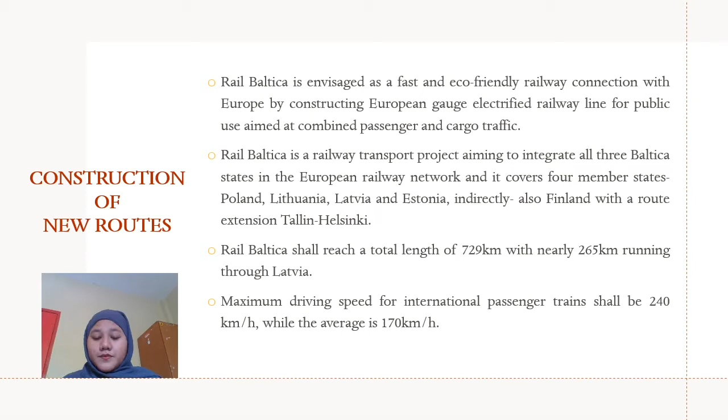For the construction of branch line, the first one is crossing of the Latvian-Estonian border. The Latvian-Estonian border crossing shall be installed in Salacgriva municipality in the territory of Latvia and in Pärnu county in the territory of Estonia. It was selected in mid 2014 as part of intergovernmental cooperation agreeing on the best mutually acceptable solution out of 3 border crossing solutions

suggested by Estonia. The Ministry of Transport of the Republic of Latvia and the Ministry of Transport of the Republic of Estonia have agreed and exchanged border crossing coordinates, which is an approval that they will respect the agreement in further project developments and will not change it unilaterally, thus ensuring compatibility of the Latvian and Estonian sections of Rail Baltica.

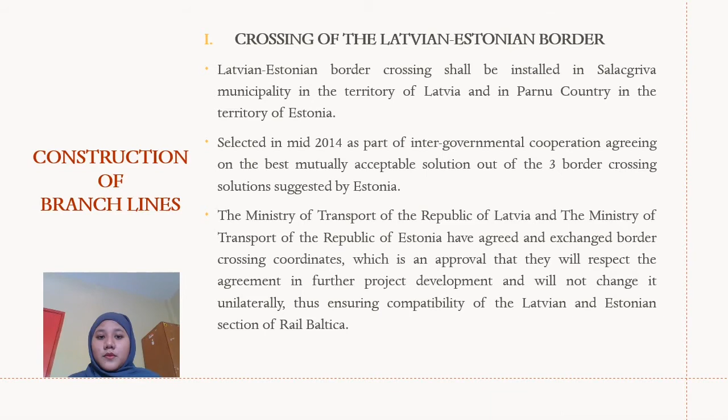Next for construction of branch line is crossing of the Latvian-Lithuanian border. The Latvian-Lithuanian border crossing point is near Grenctale in Bauska municipality, Latvia, and Dagiai in Pasvalys district, Lithuania. In this place, the border overlaps with the river Musa.

On 26 January 2015, the State Environmental Bureau made decision number 3-03/122 on transboundary impact of an activity which is subject to EIA procedure, establishing transboundary impact by the construction of European standard gauge public railway infrastructure line Rail Baltica.

According to Article 20 of the EIA law, a notification to the Republic of Lithuania, Republic of Estonia, and Republic of Poland regarding commencement of EIA procedure in the context of transboundary impact was sent on 5 February 2015.

At present, early October 2015, both countries are fine-tuning the border crossing site coordinates of Alternative A of the Latvian section and alternative one of the Lithuanian section to conclude an agreement on a common solution of the Rail Baltica Latvian-Lithuanian border crossing site. I think that's all from me.

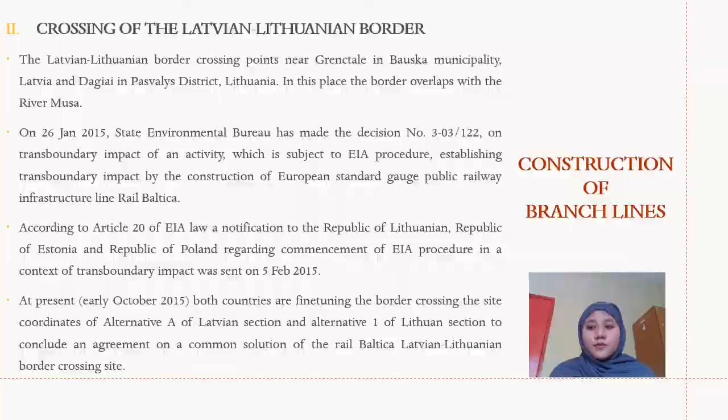From this part, we are studying the environmental impact assessment of the Rail Baltica railway. Impact on quality of river Daugava and other watercourses, fish fauna and water ecosystem. During construction, the most significant impact is on the quality of watercourses, fish fauna and water ecosystem.

Installation of bridge piers makes the river temporarily narrower and changes the current speed at the construction site, and fish spawning migration might be significantly affected by the earthwork in the river. Noise level increases, the water becomes cloudy and water quality worsens during construction. This also affects fish behavior, and additional stress might affect the efficiency of fish spawning.

Next point is extra sedimentation in the river caused by the construction work on site, affecting the quality and area of habitat. The deepest places in the river become shallower, and smaller stone and gravel, the significant fish spawning substrates, are blocked. Work on the riverbed destroys zoobenthos organisms, decreasing natural fishery productivity in the affected riverbed area.

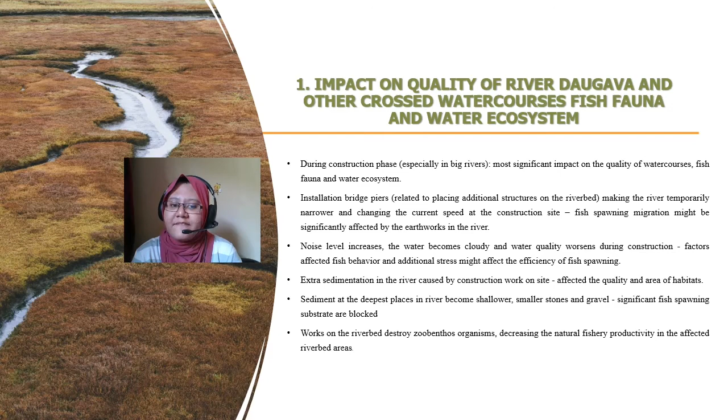Second is the impact on hydrological regime and drainage condition. Adverse impact on the hydrological regime and drainage condition of the surrounding territories is not expected, as stated in the Rail Baltica Railway EIA report for the construction project.

Second point is that changes in the width and depth of the water reservoir of Riga hydropower plant, in terms of current speed and water level within the natural possible river flow range on River Daugava, will not happen, and the implementation of the intended activity will not affect the hydrological regime. Third, the bridge piers will not have an adverse impact on the ice regime of the water reservoir.

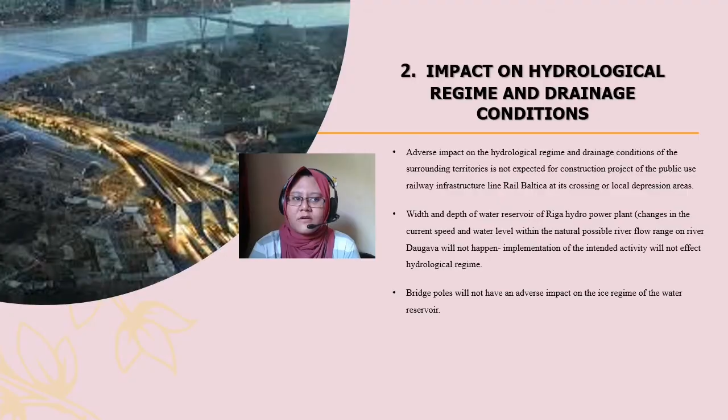Impact of tunnel construction solution. Tornakalns tunnel construction is a solution where the bearing side of the tunnel is supported on the Devonian rock, but the tunnel body lies on quaternary sediment. Thus, the Devonian rock will be left untouched, and changes in the natural flow within the upper Devonian Daugava, Salaspils, Plavinas water horizons are not expected, as stated in the EIA report.

Detailed findings on the tunnel track established a risk of blocking the natural flow of groundwater in the quaternary sediment. The bearing side of the tunnel shall be supported on the Devonian rock with large diameter drilled piles which allow groundwater to flow freely around the pile edges.

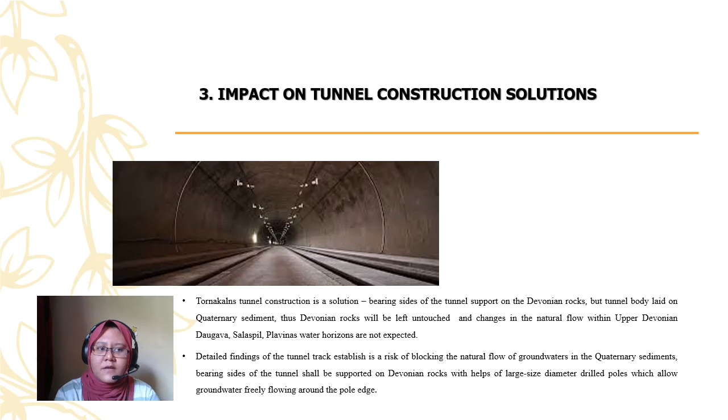Its impact on air quality. Calculation of the dispersion of polluting substances indicates a significant impact on air quality during construction is not expected. Highest calculated PM10 and PM2.5 concentrations develop close to the construction and disposal sites, caused by activity with bulk cargo, while a relatively higher impact by vehicles is expected in direct proximity of the site where the track is constructed. That's all from me.

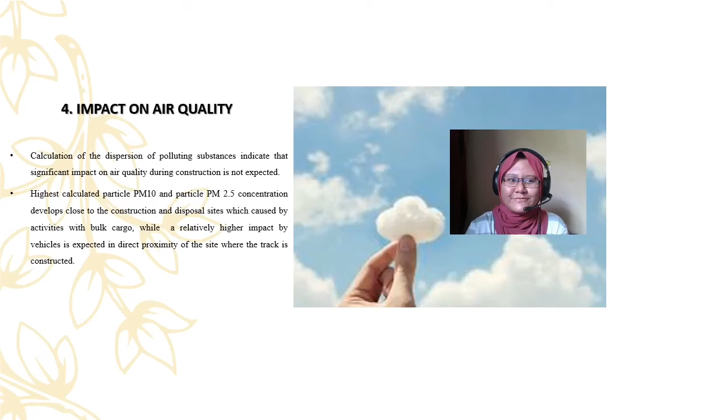I will be explaining more further about the method of prediction of the impact assessment. So firstly, in the EIA report Rail Baltica, which is the construction of public railway, it has stated the direct and indirect affected properties. So for the directly affected, there is information collected about buildings which are located in the Rail Baltica partition zone and which have to be demolished. There are 38 buildings affected.

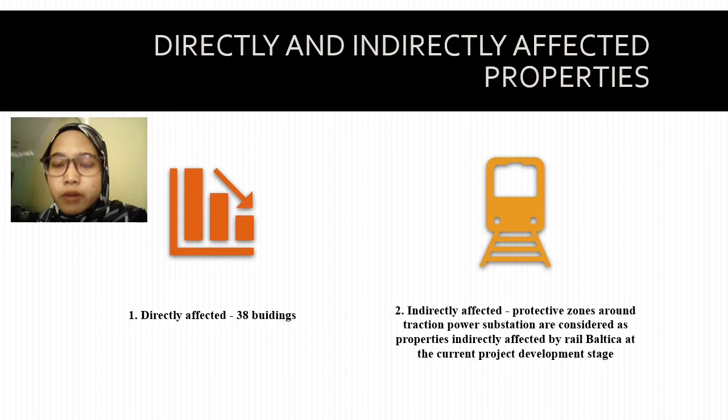For the indirectly affected, there is a power transmission line in the section affected by its protective zone at the current project development stage. So all of these documents and information were received by the relevant government body such as DOE.

Next, for the prediction of air quality, due to the wear and tear of brakes and wheels and also due to the suspension of particles that has been analyzed by PM10 and also PM2.5, the assessment established in the implementation site is significantly lower than the statutory threshold of air quality to protect human health.

For the noise level, by using the GIS software, it can roughly calculate the noise distance from the places affected at any levels. So the key noise sources stated in the report are the state main, regional and local roads, streets, existing rail tracks, airport Riga, and industrial noise sources. Next, the vibration impact was also calculated by using the vibration corridor for the analysis.

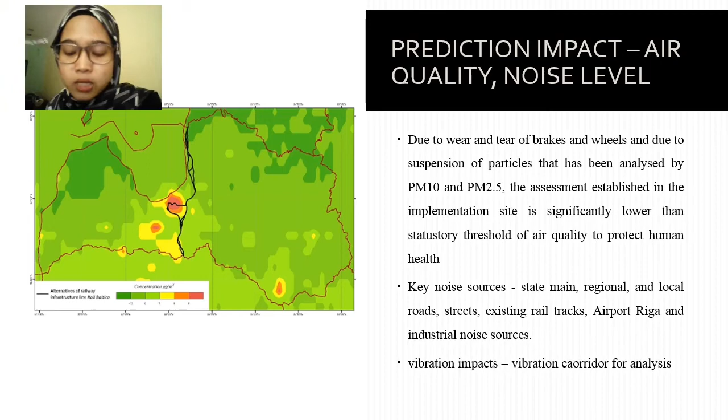Lastly, the prediction of hydrogeological condition. It has stated that in the Rail Baltica, there are 3 river basin districts affected, and also all alternatives cross 6 large rivers, as mentioned in the slide.

So the agricultural activities were also affected from the Zemgale region in this section from the river Iecava to the border with the Republic of Lithuania, and the land reclamation systems are maintained in a better technical condition than in the rest of the Rail Baltica section, where the land reclamation systems were blocked up, largely overgrown, many beaver dams were found, resulting in hindered water flow.

Within this analysis, all of this was analyzed and visualized by maps produced in the GIS software, and other than that, all of the flora and fauna were also affected in the development stage of the railway project. That's all for me.

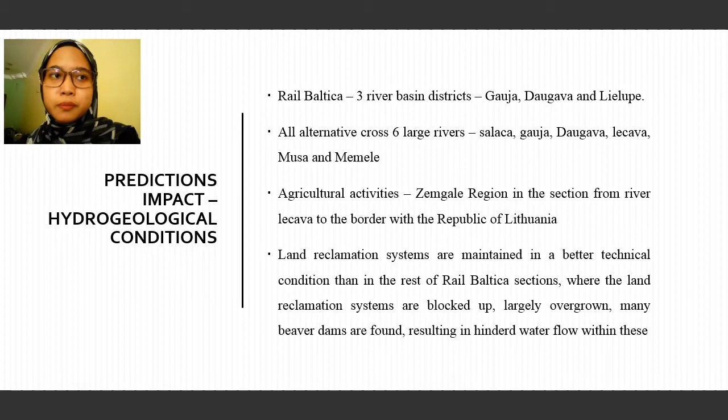Assalamualaikum and hello. My name is Muhammad Nukari bin Dahlan, and for my part, I will explain about the mitigation action suggested in the environmental management plan.

Okay, for the first point, the construction and operation of the railway will affect the habitat in the area. So to overcome this problem, the partition zone of the Rail Baltica railway line will be fenced off with at least a 1.8 meter height fence, while some forest areas may have fences with a height of 2.2 meters to 2.6 meters, so that big animals cannot cross the area.

Next, in order to reduce the risk of groundwater blockage in the quaternary sediment due to the tunnel construction, the bearing side of the tunnel shall be supported on the Devonian rocks with the help of large diameter drill piles, which then allow the groundwater to flow freely around the pile edges.

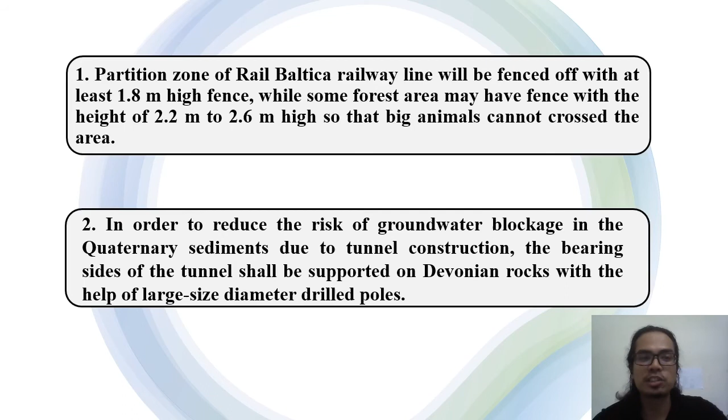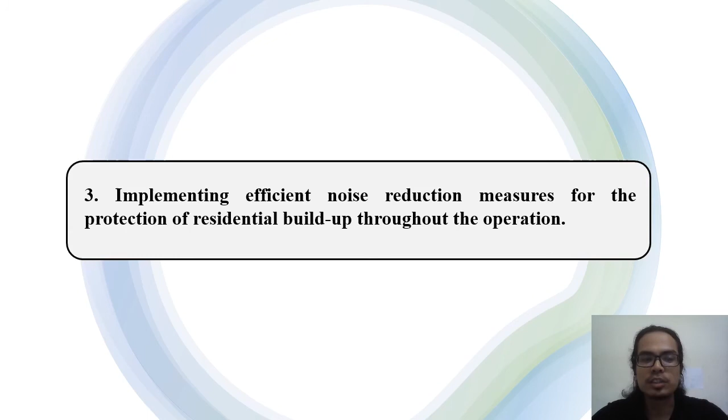Next one is the implementation of efficient noise reduction measures for the protection of the residential build-up throughout the operation, because it is expected that operation of the envisaged railway line will increase the overall noise level, especially at places where there are no significant sources at present. Okay, that's all for my part.

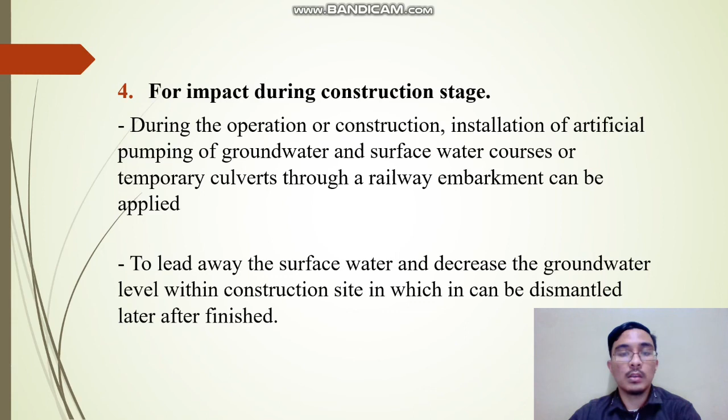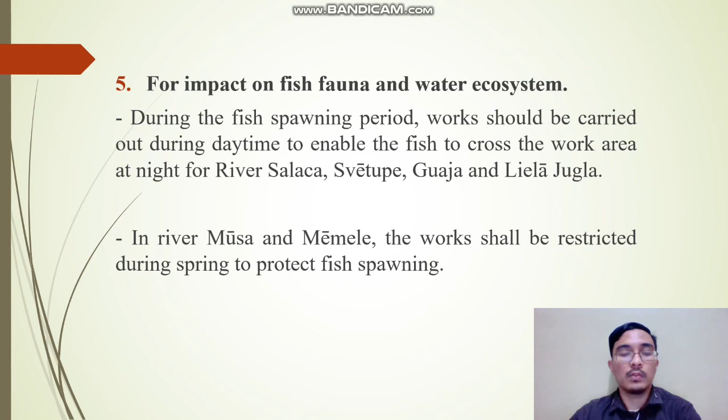Okay, next is for impact on fish fauna and water ecosystem. So during the fish spawning period, work should be carried out during daytime to enable fish to cross the work area at night for rivers Salaca, Svētupe, Gauja and Lielā Jugla. And in rivers Mūsa and Mēmele, the work shall be restricted during the spring in order to protect the fish spawning.

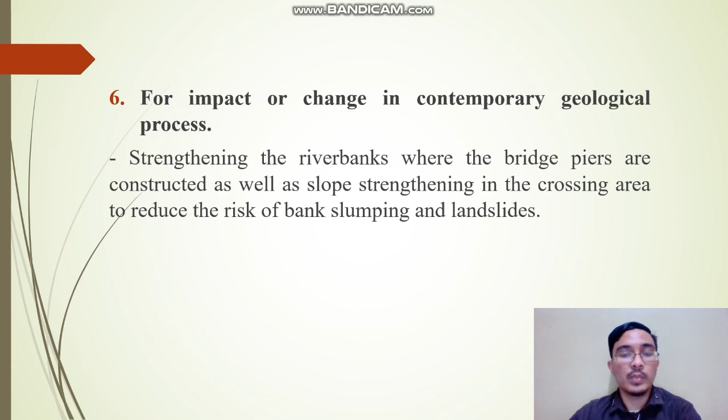Lastly is the impact or change in contemporary geological processes. So at this stage, strengthening the riverbank where the bridge piers are constructed as well as slope strengthening in the crossing area can be done in order to reduce the risk of bank slumping and landslides from occurring. Okay, I think that's all from me.